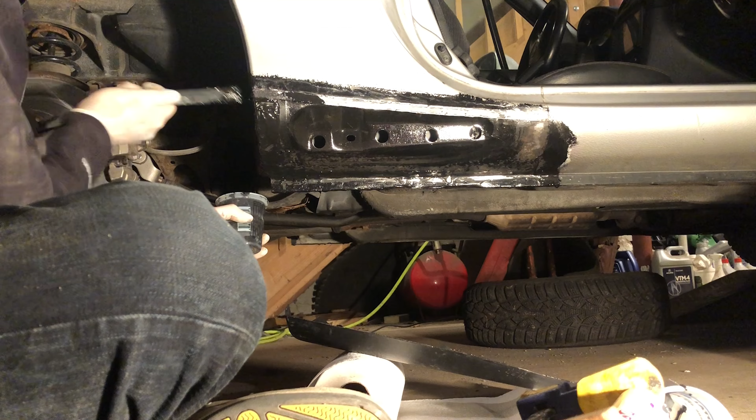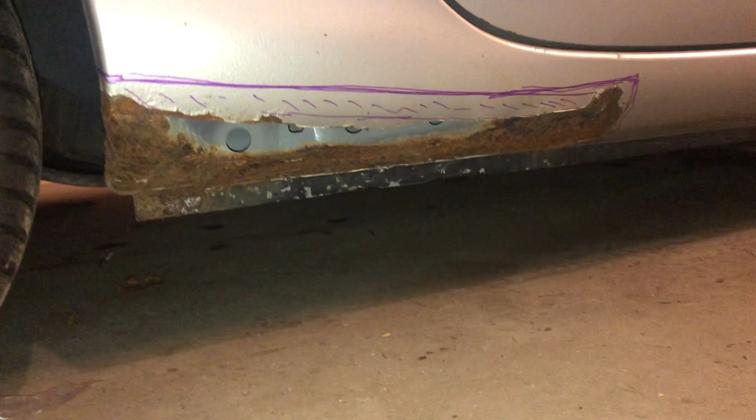Coming up in this video, I play with some glue, I get excited, I almost lose my sense of taste, and I show you the proper way to fix rusty panels on a car, taking them from looking like this to looking like this.

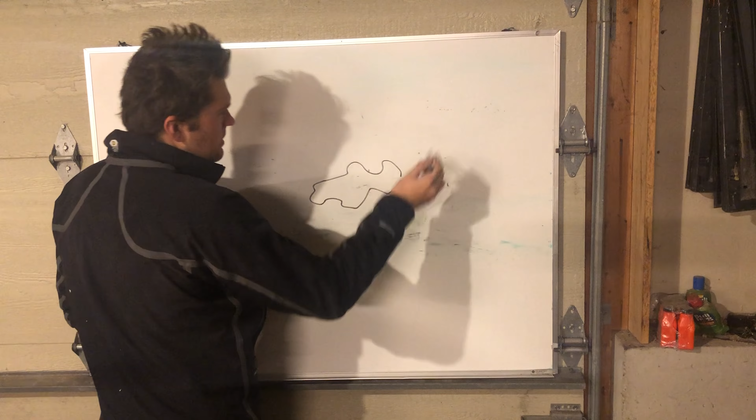So I'm going to quickly illustrate the traditional way that many body shops might repair a rusty panel, and then the way we're going to do it without any welding. You can think, okay, here's my rusty spot, and this is a panel. So what you might do is you cut here, and then you're going to take this out, effectively leaving a hole here. This is the traditional style. And then you would replace a panel, same size, just like that.

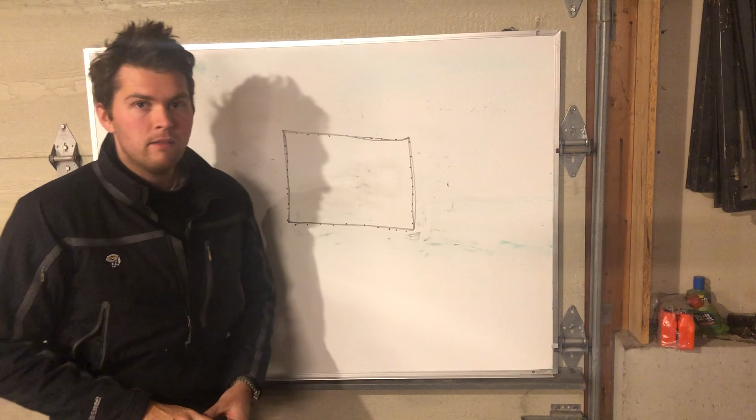And then on the back side you might paint like a POR 15, a rust stopping paint. And then you would spot weld here. And you spot weld all around the edge of the panel to secure it to the panel. Now, this repair might look good for 6 months, and then it'll start to rust and it'll start to bubble up along the edge here.

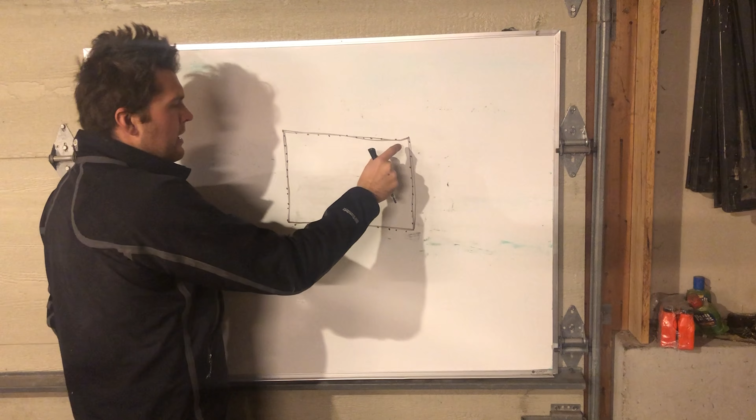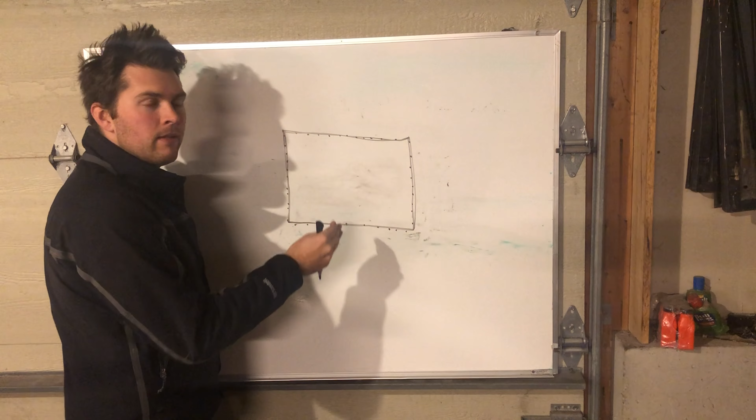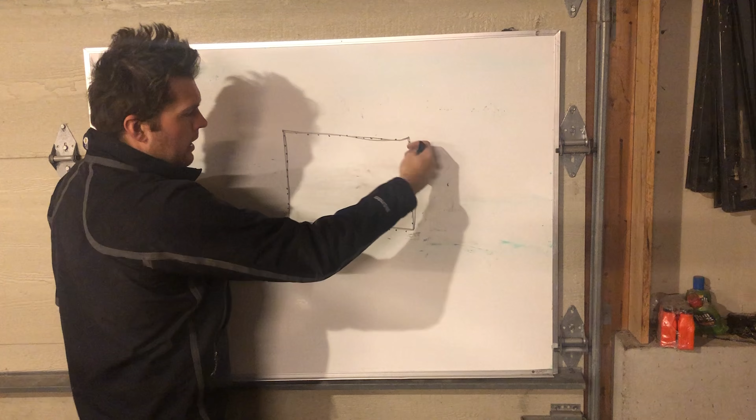And what's happened is the heat from these spot welds has burned off the rust protectant paint on the back side of the panel, and when the heat has burned off all the paint, it's just bare metal, and bare metal on the inside of a fender quickly begins to rust. And then you'll see on repaired panels the rust start to seep forward along the edge where it's been replaced with a new panel.

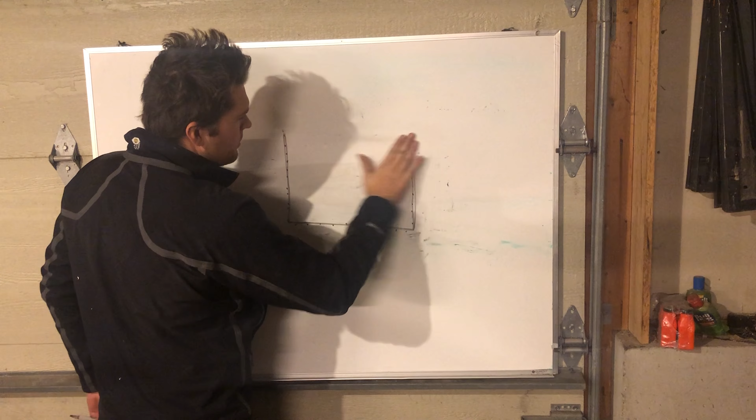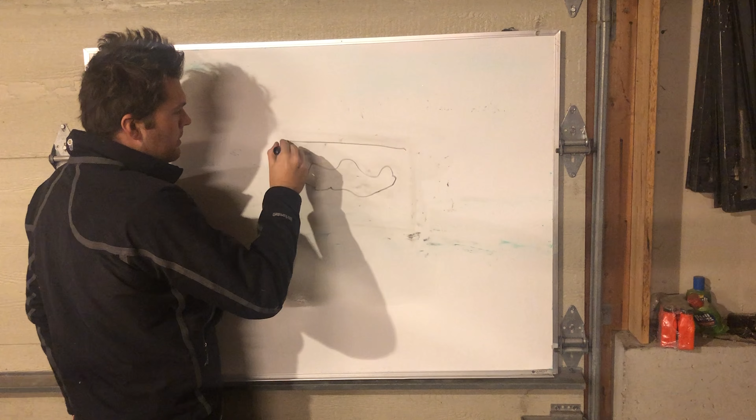The new way to do it, and the way that we're going to do it, is we are going to glue a panel on. Rusty panel, you can think of this as a rusty hole on a quarter panel or wherever. Alright, we're going to cut it out here. Same process to cut the rust out. And then this is going to be effectively a hole in the quarter panel.

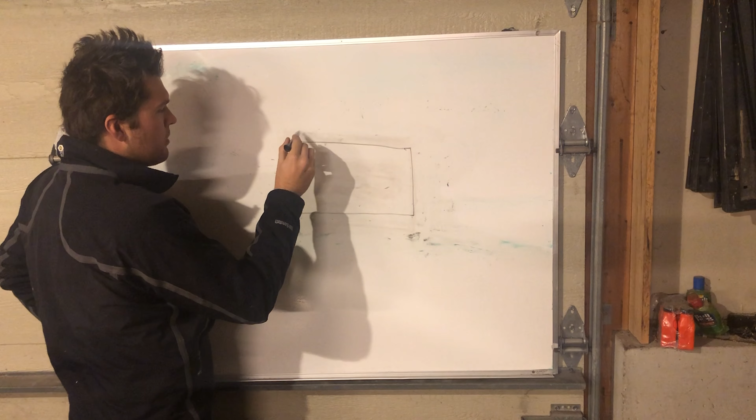Now that we have this hole, what we're going to do is we're going to take a tool and we are going to press a lip into this hole. So the tool's going to overlap and it's going to create an indentation, probably I think it's about 3/4 of an inch, about this size. And there'll be effectively like a stepped down lip, and it will look like this. With this lip, now we're going to take our replacement quarter panel and cut it oversized so that it is bigger than the original hole, and it's going to rest on this overlapping lip here.

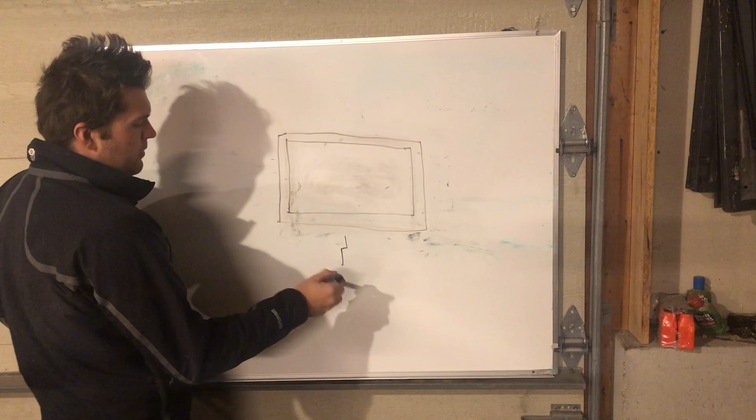And so what we're going to do is we're going to use a special panel bonding adhesive, which is specifically designed for this repair job, and we're going to run a bead of glue in here. Just like this. Just around this edge, and then we're going to put the new panel on, and we're going to clamp it down and make sure it is 100% secure.

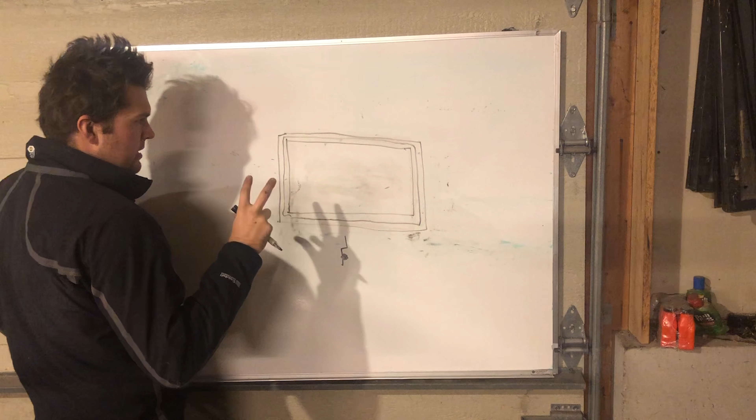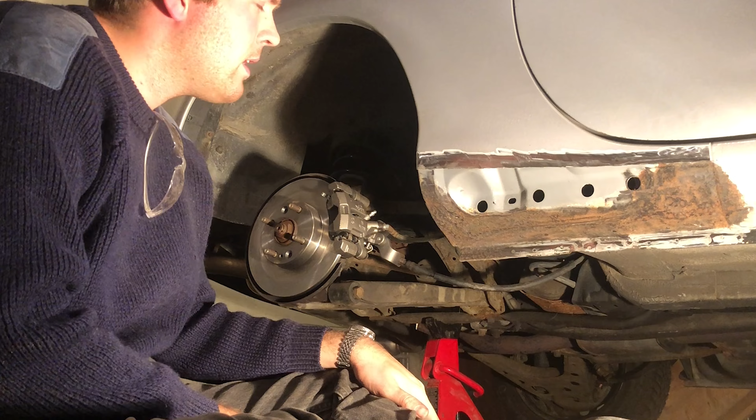Okay, step 1 here is to remove all the loose rust, because the POR 15 rust protectant coating we're going to use can seal rust and stop it, but only if there is no loose rust. So you want to knock off all the loose rust and then cut the old quarter panel as straight as you can. I've taken off all the loose rust, and I cut back the quarter panel probably about 1.5 inches, maybe 2 inches. I took all the rubberized coating off of the little bit of rail here.

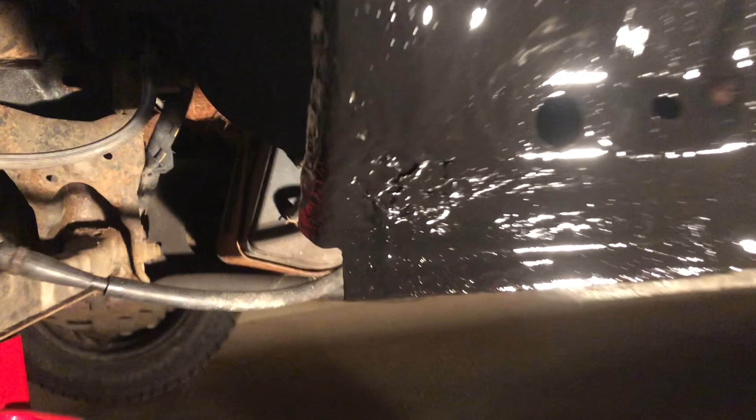Okay, after knocking off all the loose rust and cutting back the old panel, I have covered this whole corner with POR 15 and I'm ready for the next step, to emboss a lip in the old panel so the new panel will lie flush on the old panel.

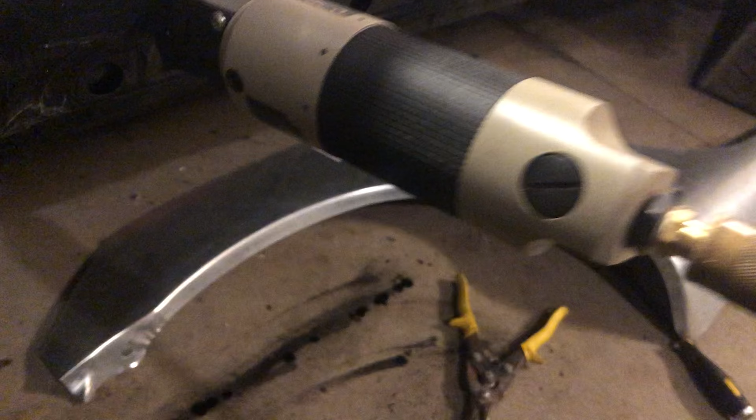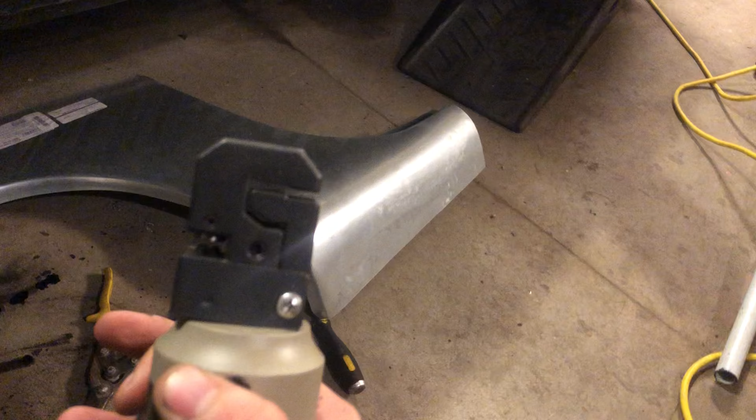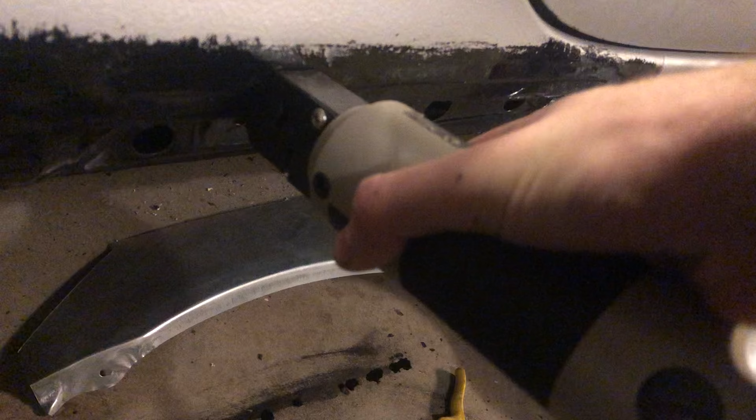Okay, this is the tool we're going to use to emboss the lip on the old quarter panel. You can see it's pneumatic, and it will impress that lip just there. Got this from Harbor Freight. It was fairly inexpensive, I think $65, and it works really well. It's hard to get into tight spaces, but overall it is a super effective tool, and it will give you a very clean embossed lip.

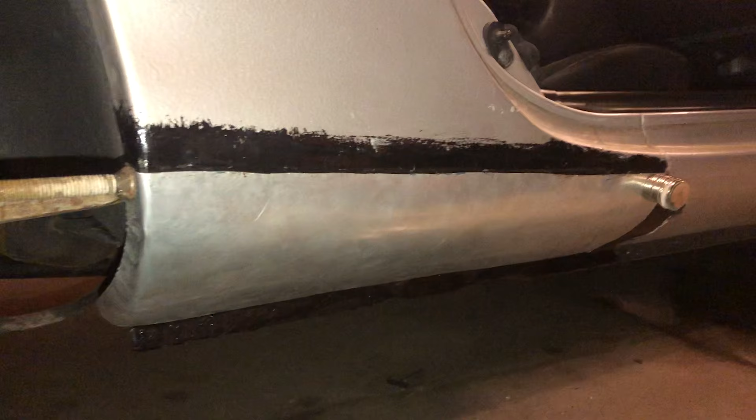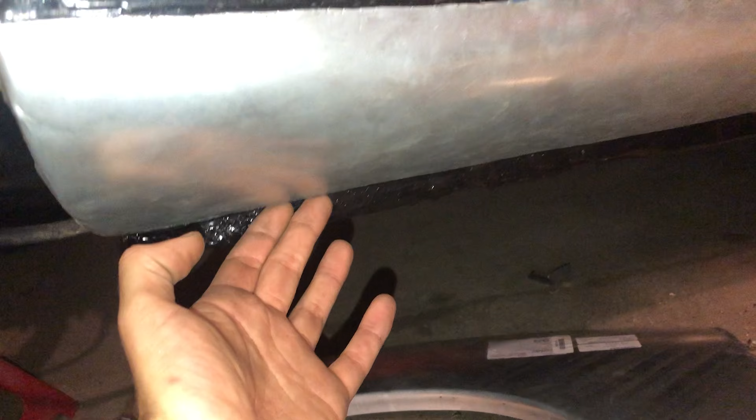After successfully punching the lip into the old quarter panel and fitting up the new panel, we are ready for the next step for paint. And a word of advice here is when you're cutting down your new panel to the size of the hole you're trying to fill, take your time and be careful because it's very easy to overcut. I overcut a little bit on this panel, but not bad. It's looking really good, as you can see.

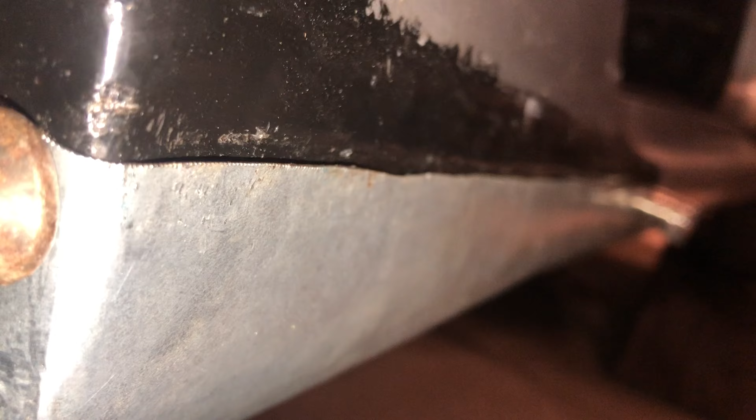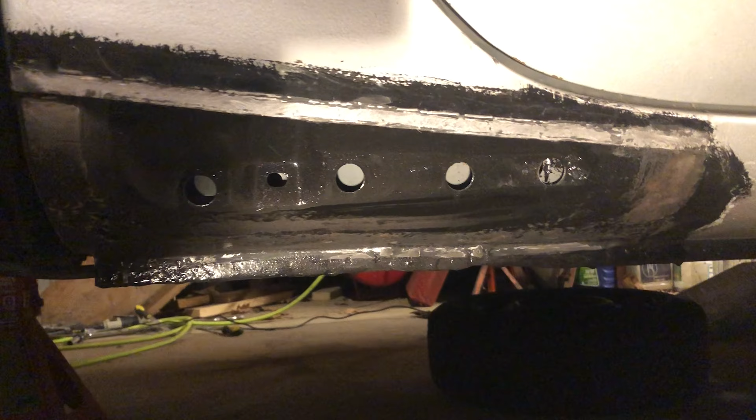Alright, so here's the new panel. I painted it and then took the paint off where the bonding's going to happen. Here's the car, and did the same thing here. Took away the paint where we're going to bond. It's really important that you have a metal glue metal bond.

So once the new panel and the car is prepped and ready, you can start to glue. It's really important that you get a really good bond between the new surface and the old surface. So that means plenty of glue on both sides. We're fully coated. Oh, let's see. Really start to see it.

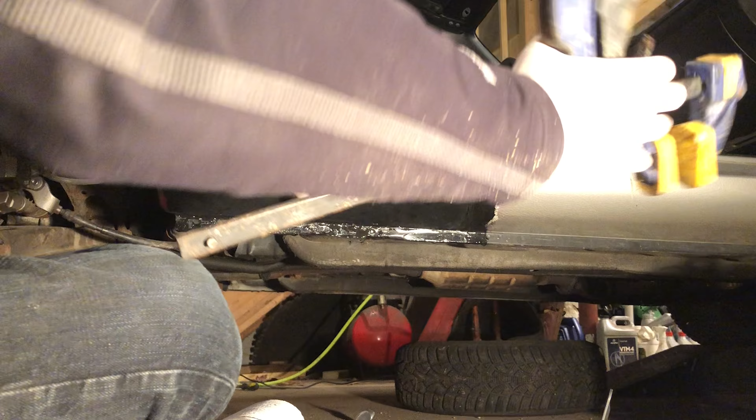So now when you're gluing the new panel on, it's super important that you get a good force pushing it onto the car, good clamping force. If you have clamps, now would be a perfect time to use them.

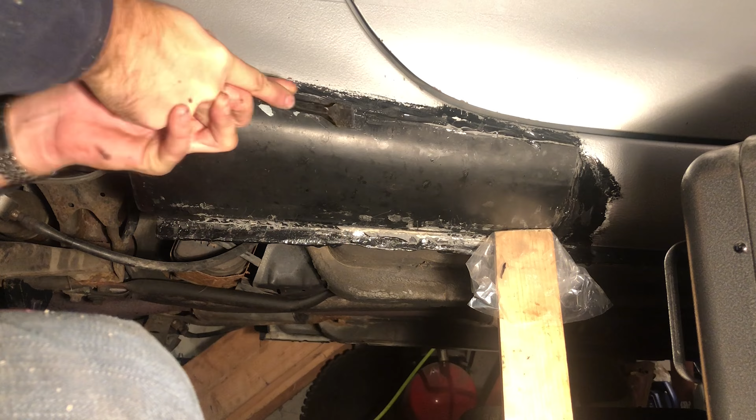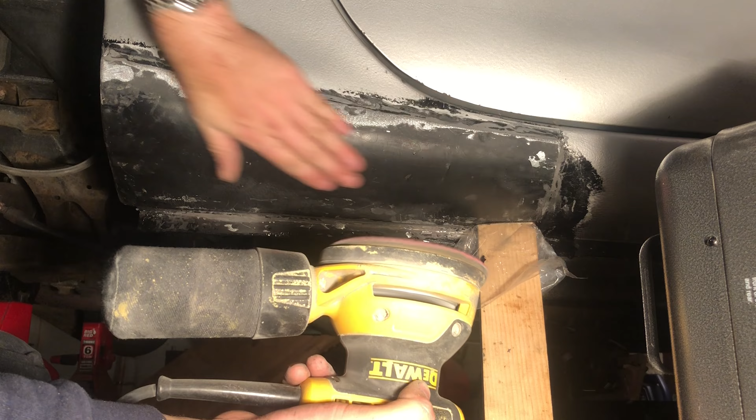Once the panel is glued on and the glue is dry, now you can start to scrape away the excess glue that is pushed over into the seam and get ready for the next step. With the scraping all done, you can start to use a rotary sander, or you can hand sand if you want. I used 120 grit sandpaper for this step.

After sanding and prepping the surface with acetone, you're ready to lay some Bondo on there and start to fair it up. Alright, so everybody has a different style of sanding Bondo and different grits of sandpaper, but I started at 120 and worked down to 220. And you just want to take your time and make sure that you're not getting any of the seam in the final product.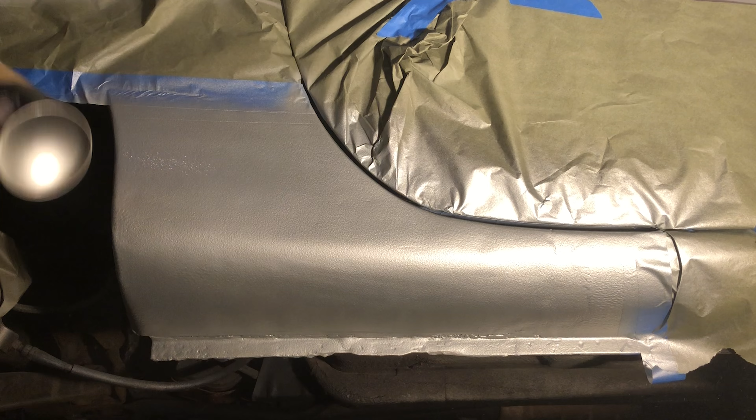Once that's done, you can start to put some color on. I would suggest about 3 to 4 coats and waiting between coats to get a good base coat. Once you're done with that, you're ready to put some clear coat on it. Take your time and do lots of coats. Okay, so clear coat has been applied and it looks really great. There it is.

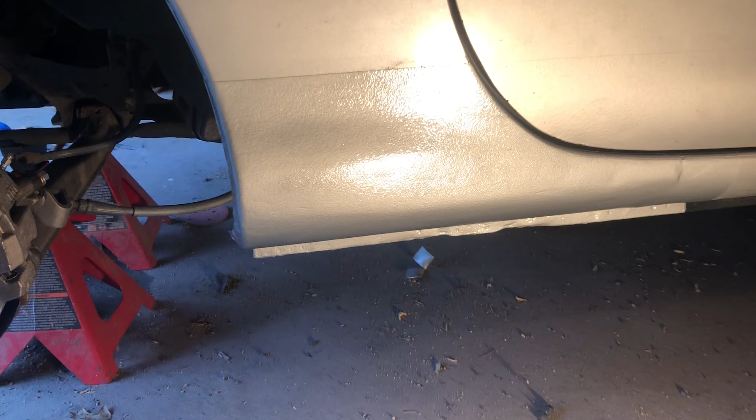Alright, so that's the end of the project. Altogether, I am super happy with the way they came out.